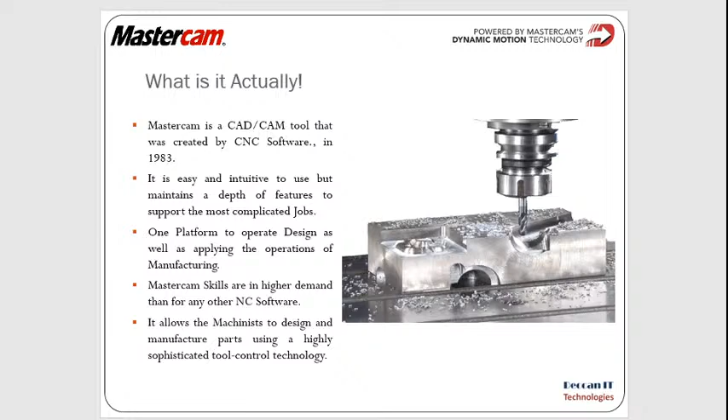CAD/CAM advantages: we have seen that complex parts and integrated shapes can be manufactured. Then effective utilization of raw material is also very important, because wastage of raw material not utilized properly is a huge loss to companies. Productivity is also very critical because everybody wants to manufacture as quickly as possible.

As we know, the era has gone when one part was designed, manufactured and sold for years together - like Premier Padmini or Bajaj scooter, sold for so many years. Now every year, every manufacturer has to deliver multiple models. That's why productivity is very important now, and eliminating costly mistakes and wastage also plays a vital role in manufacturing.

Next, because parts are being manufactured at different places, manufacturing with correct tolerances and precision is also very important.

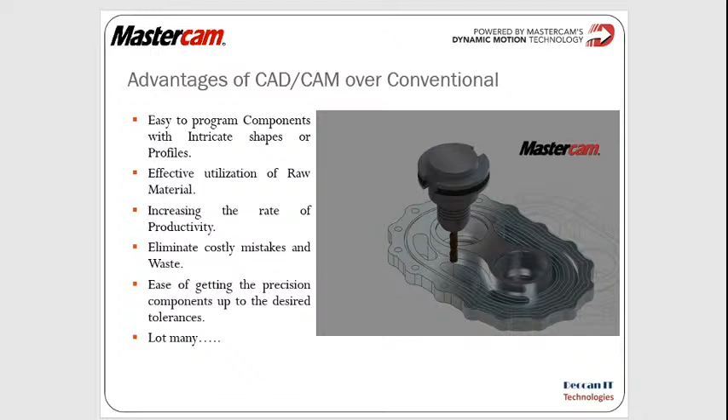Turning lathe can be an XZ-axis lathe. Many of you who have used CNC manufacturing in your workshop might be aware of that, or once you see the video you will understand what CNC milling is. Because of time limitation, we may not go through the turning areas.

So multi-axis machining is what you're able to see on the screen. That's multi-axis where not only X, Y, Z but A, B or C - that rotary table will have to rotate in order to cut the complex part.

Then there is wire EDM machining, which is non-conventional machining with wire at very high voltage. There is a spark taking place and the part is cut with an erosion kind of process, a high voltage erosion.

Another is the router. Router is almost same as a milling machine, but more used for plate or sheet machining, especially in shipbuilding, aerospace industries, helicopters, where different parts are cut from sheets for proper material utilization and manufacturing multiple parts in bulk.

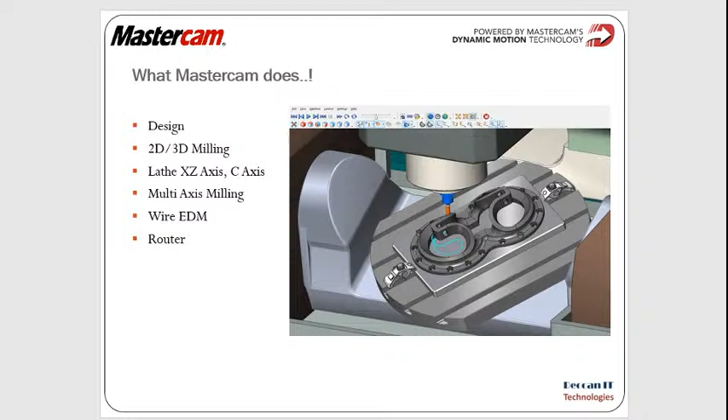So in design, as we see, you can create surfaces, solids, have different layers and labels, organize yourself for manufacturing, as you're creating fixtures and tools.

Whenever you get a CAD part from a customer, Mastercam has got almost all translators. If you want to do a project for one company, that company may use Creo, so you have a Creo translator. Another company uses SolidWorks, there is a SolidWorks translator. Somebody uses Autodesk, so there is an Autodesk translator. Apart from that, step and parasolid are normal neutral kernel translators.

So you're able to import that, create your project on Mastercam, and deliver it to the companies wherever you are doing the projects.

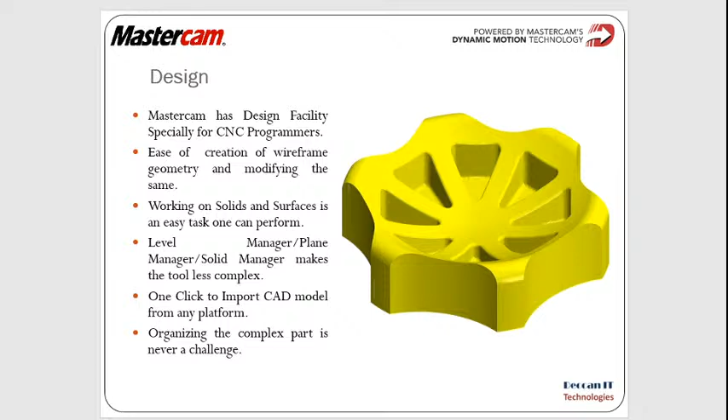For milling, various applications are there - maybe die and mold industries, turbine blades, different sectors. So the most complex manufacturing with high efficiency machining or high speed machining can be done here.

Because of the user friendly interface, you can easily change parameters and modify programs accordingly. Probing is also one option available with Mastercam, which can do on-machine inspection. There is a simulation tool within the software which helps show how the tool path is being cut. There are standard libraries, operation libraries, tool libraries, which help automate manufacturing. I'll just show you a small milling video here.

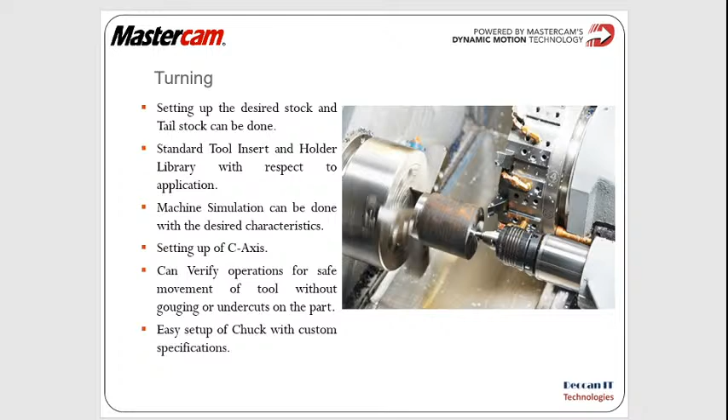I'll just have a look at some industrial users and education institutes proudly using Mastercam as their important CAD CAM tool. When you look at Army Base Workshop, Central Scientific Institute and Research, most of the very renowned institutions like Advanced Training Institute, BARC - Bhabha Atomic Research Centre, Delhi Institute of Technology, and BDL.

BDL is Bharat Dynamics Limited, a missile manufacturing company in Hyderabad under the government of India. Various advanced training institutes, engineering colleges, OFMA workshops and railway workshops are also users.

You can see NTTF, KGTTI - that is Karnataka German Technical Training Institute. NTTF all centers are using Mastercam, Indo-German Tool Room all centers are using it, and all technology centers of MSME are using Mastercam.

University of Pune - almost 100 colleges are using Mastercam not only for teaching but they conduct examinations also on the software. CTTC Bhubaneswar, CITD Hyderabad.

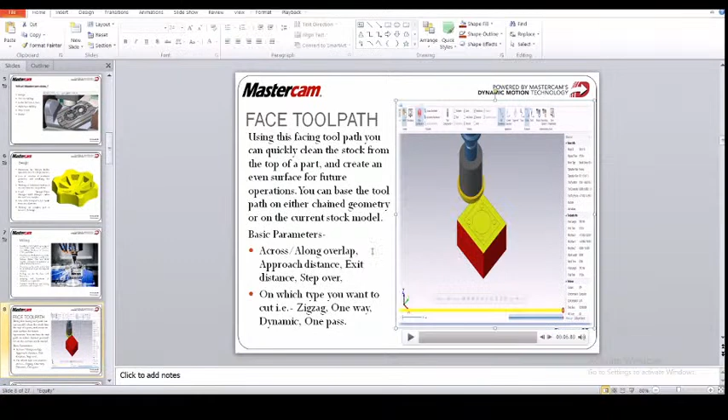So let me show you the Mastercam interface 2020. As you can see there is an existing model. On this existing model I have to create facing operations.

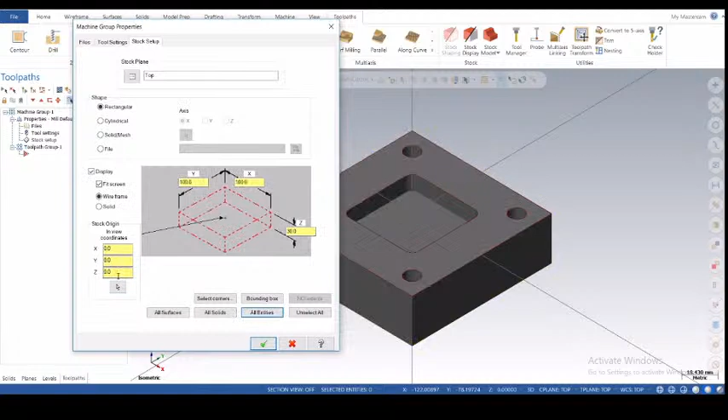So first of all for the facing operation we have to do the stock setup. For that we go to the toolpath manager, where you will get properties, and in properties you have to set the stock setup. For the stock setup we select all entities, and after that give the value of Z for the facing - I have given that and displayed it. After clicking OK, you will get the wireframe stock. This is our extra Z value, 2 mm.

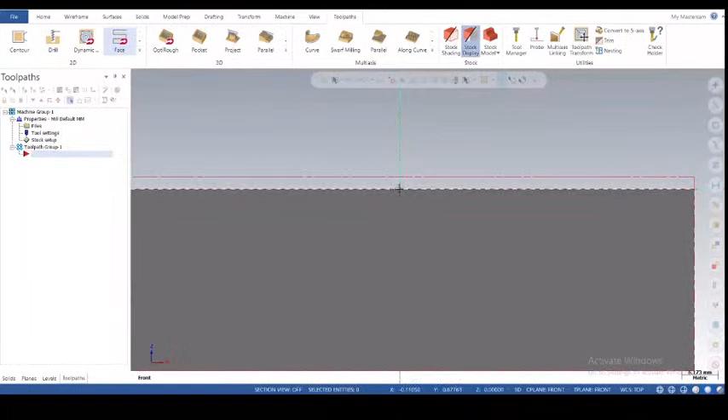After that, go for the operation from 2D toolpaths. Here you will get so many toolpaths like contour, drill, dynamic mill, facing, dynamic contour, pocket, and peel mill - there are various types of toolpath in 2D.

First, face - after clicking on the face toolpath, you will get a window for chain selection. Here we get several methods for selection, and we have to select the chain. After selecting the chain, you have to click on it.

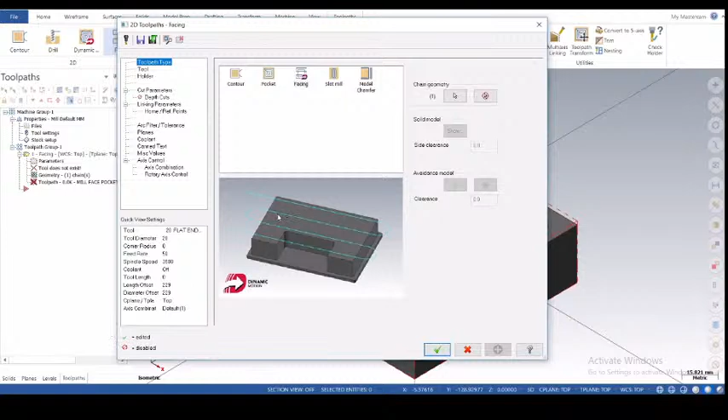Okay, after that you will get a window of 2D toolpath facing, and according to your application you have to select the toolpath type, which toolpath you are doing now. So I have to do facing, so I have selected face, and next we have to select the tool.

In this tool you can see various types of parameters like tool diameter, corner radius, tool name, tool offset, length offset, head, diameter offset. There are various cutting parameters and tool parameters. According to your application you can give the value of tool parameters or cutting parameters.

In this comment box you can write anything for the operator. For example, I'm writing here that facing with my tool that I am using or will use.

So for the tool you have to go to the standard tool library. To go to the standard tool library, you have to click on select library tool. After that you will get a lot of tools. If you want to filter, you can also filter. So after selecting filter I just got a face tool of 50 diameter and click OK.

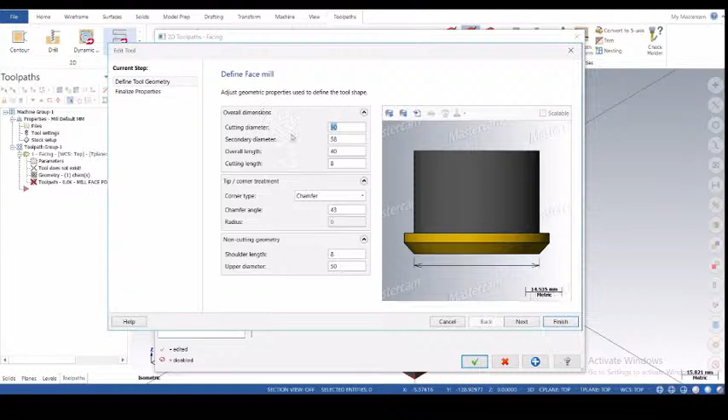You can also modify that. On right click of the tool you will go to edit tool, and here you will get cutting diameter, secondary diameter, overall length, cutting length. You can also give the corner type you have on your tool. After that finish, and in comment I'm just writing facing with

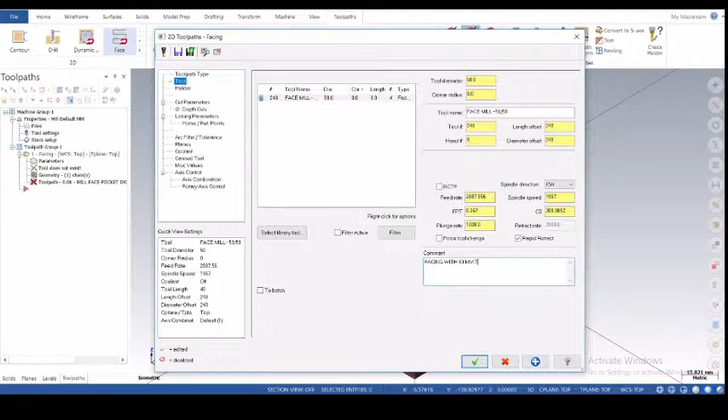50 tool. Okay, and coming to the next, the holder.

As per your facility or availability of holder, you can select the holder. I have selected BTC30016. Coming to the next parameters, in cutting parameters you will get the style that I told you in the PPT.

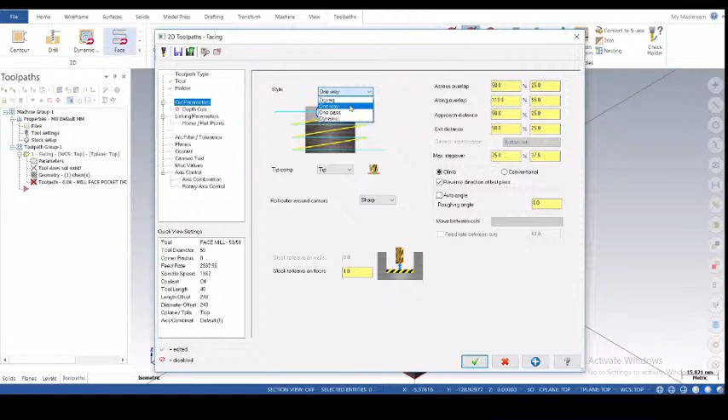There are 4 types of style like zigzag, one way, one pass, dynamic. Basically the most preferred and preferable style is zigzag, and here we will get across overlap, along overlap, approach distance, exit distance, and step over also.

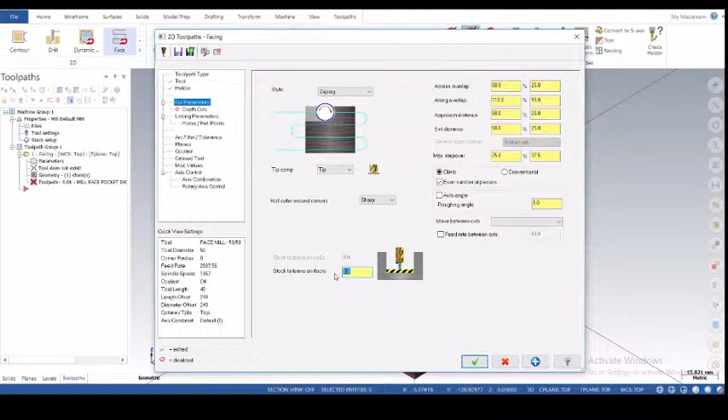After that here you can see climb and conventional, like down milling and up milling. After that, if you want stock to leave on floors, you can give that value, or 0. Coming to the depth of cuts, you can provide your depth of cut value—I am just providing 0.5.

After that, keep tool down. If you select keep tool down, then your tool does not repeat the retraction or clearance motion each time.

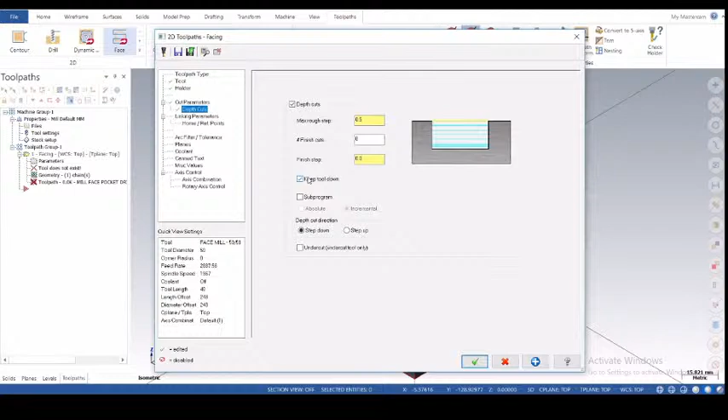Coming to the next, linking parameters—this is the most important set of parameters. In linking parameters you have to select clearance, give the value of clearance, and set all in absolute. The feed plane is okay with incremental, and depth also in absolute.

As you know, it automatically selects the top of stock. As you know, we have given the Z value plus 2, so it automatically generates that 2. After that we just click OK, and you will see the toolpath here.

This is our toolpath, and this is our along overlap, this is our across overlap.

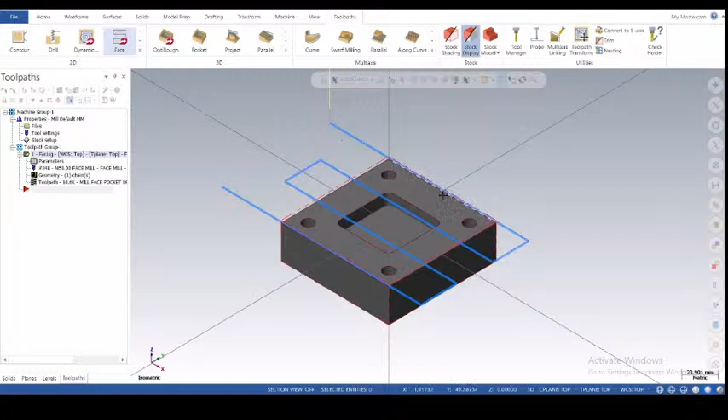Let me show you the 2D toolpath of this facing operation. Click on this backplot and you will get the 2D toolpath, how it's generated, and play. Just see how it cuts the material for the facing toolpath.

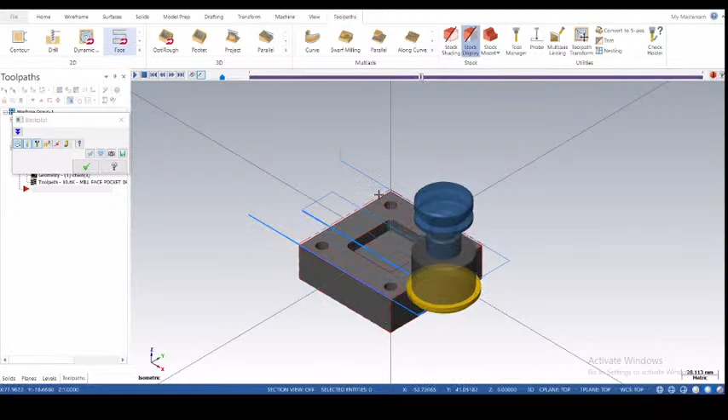This is our 50% across overlap, this is the along overlap.

And if you want to see this in the 3D simulation window, then you have to go to verify, and after selecting verify you will get another window for the simulation.

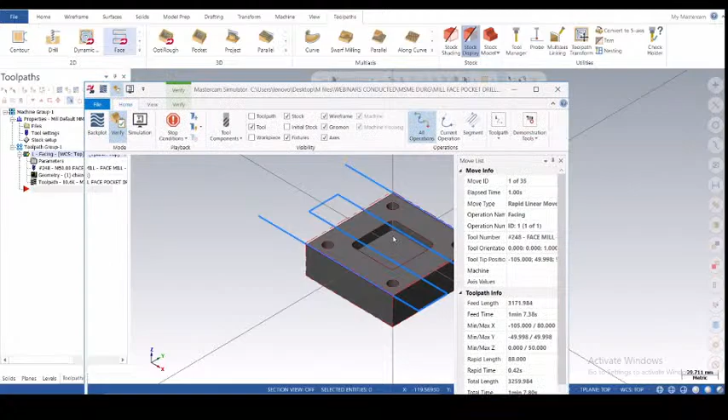As you can see, this is our 3D simulation window. Just decrease the motion of the cutting tool, and in this window you will get so much information like move ID, move type, what type of operation you're doing, the operation name, and which type of tool you're using. There are various types of information you will get.

This is our simulation window. Let me start the operation. As you can see, the tool is coming downward and cutting as per our given depth of cut, given style, and cutting method.

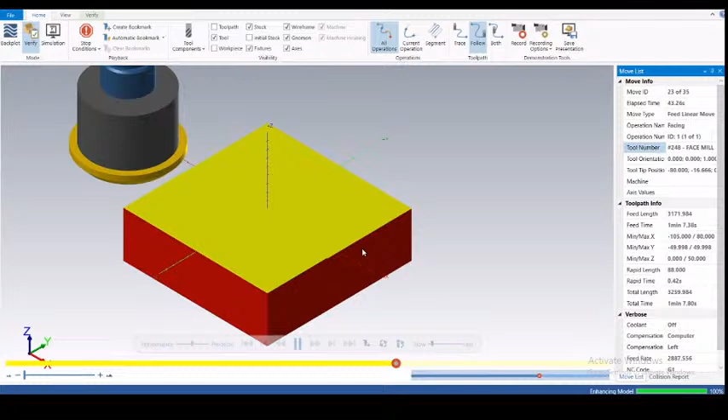So this is it for the facing operation.

And after OK, it will ask for the path where the file will be saved. Okay, I'll just save it on the desktop.

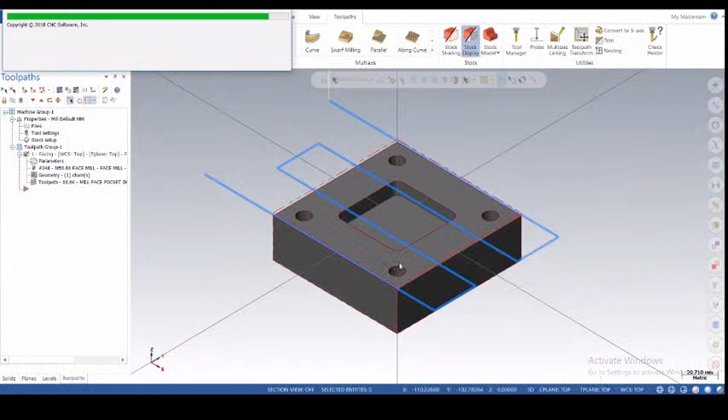After that, you will get a Mastercam Code Expert window, and in this code expert window you will get all the NC code as per your commands. You will get this, just see.

This is our all NC code generated. Okay, thank you.

Coming to the next toolpath is our pocket toolpath. This toolpath is used to clean out material from an enclosed boundary, using the specified depth of cut. It's used for the roughing process. Similar to other toolpaths, there are basic parameters like rough cutting methods, step over percentage, entry motions, depth of cut, and linking parameters.

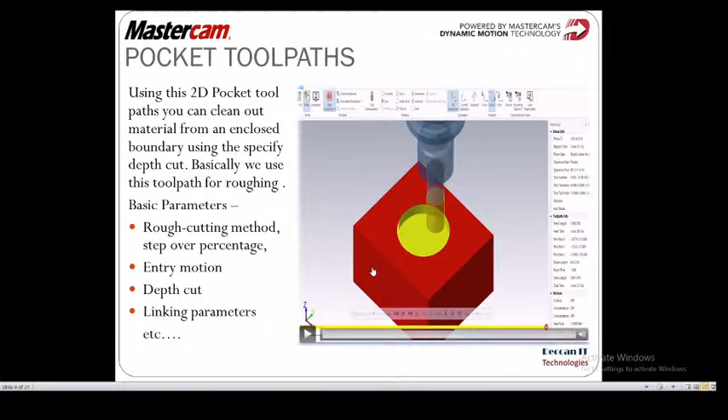Let me show you the Mastercam interface with this pocket toolpath. As you can see, here is already existing material. On this existing material, I have to run a pocket. For the pocket, I have to choose this pocket option, and by selecting the chain, I have to select that chain, keeping in mind the arrow direction.

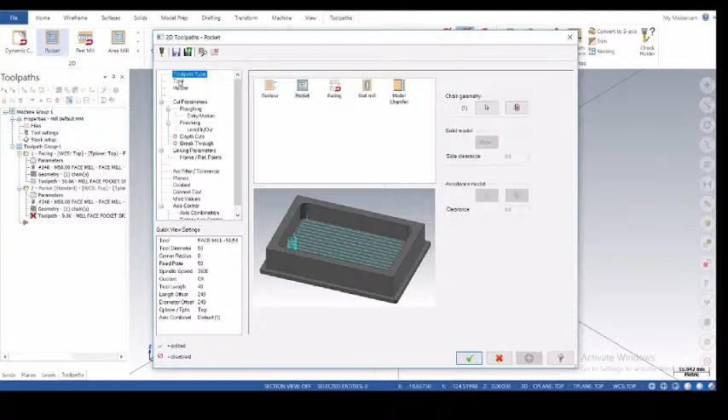So this is our toolpath type: pocket. Coming to the next, in select library tool, suppose I have selected a flat end mill. According to your application you can provide your cutting parameters, tool parameters, and what is the holder, and the cut parameters. Here you can see stock to leave on walls for the finishing purpose. I just click on 00 because we don't need any finishing.

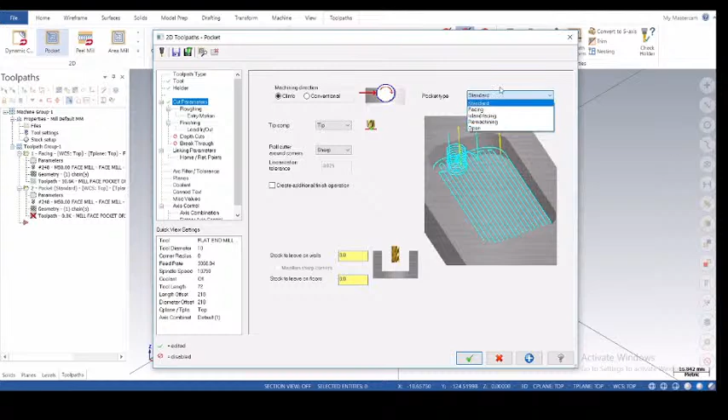Here is the pocket types. You will get the pocket type standard facing. Next is roughing, where you will get some cutting methods like zigzag. I just select parallel. This is the step over percentage or step over distance. Come to the next, this is the entry motion, how it will enter.

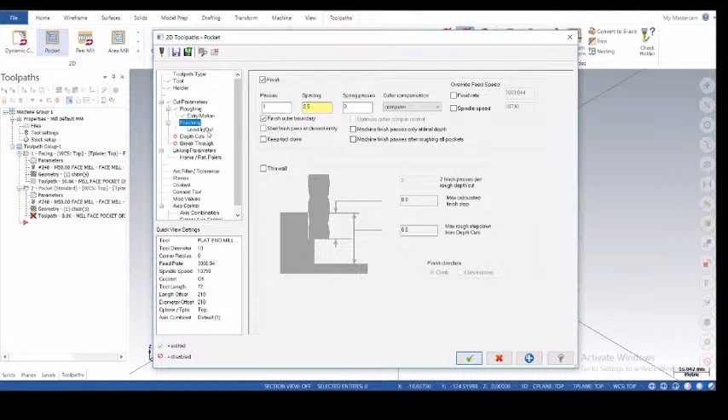Coming to the next, in finishing, if you want to do any finishing passes, you can provide that. And lead in lead out, this is not necessary - I will tell you about lead in lead out and why we actually use that. And depth cuts, 1 mm.

Keep tool down, linking parameters, and clearance as per your requirement. Top of stock, since you already did that facing operation, and depth - for depth we have to select or choose the depth.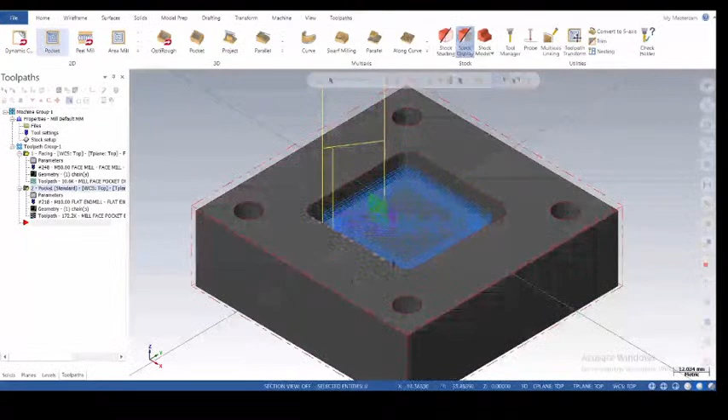As you can see, this is our 2D toolpath. Let me show you how it cuts the material.

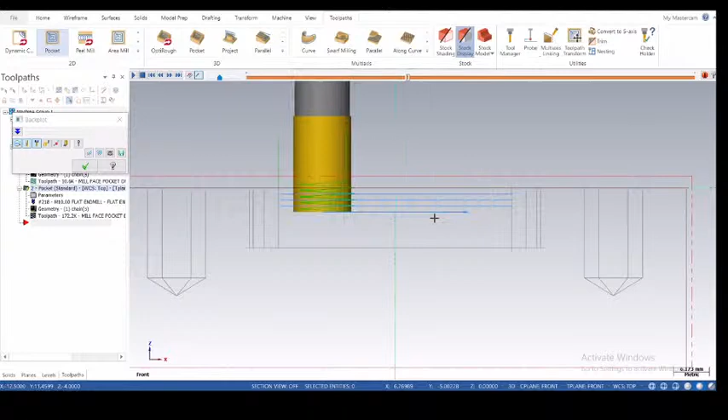As you can see, as per our given depth of cut value, it will cut that material. Let me show you in 3D motion. For the 3D we have to go for this verify, and you have to just start on play, and you can see how the material will be cut.

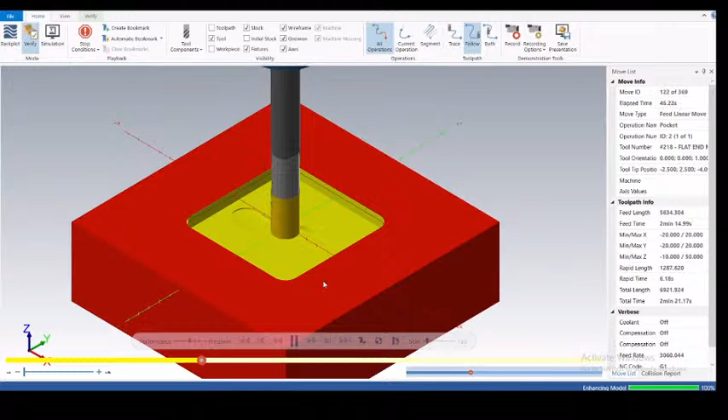Coming to the next operation is our contour operation. For the contouring we have to select the contour toolpath. Here is the contour toolpath, and by selecting chain, I have to select the chain for the contour operation. This is our chain.

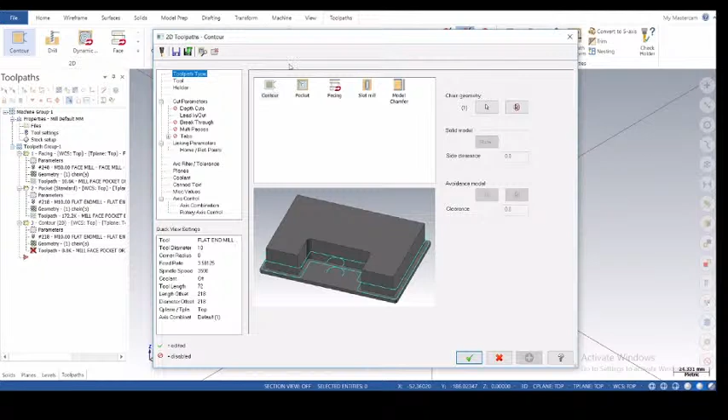After that you will get the same window. For the toolpath I have to select contour, and I've selected the same tool, flat end mill 10 diameter, and go for the cut parameters. Here you have to define compensation direction, on which side it will go, and here is stock to leave on walls, stock to leave on floors, and go to the depth cuts.

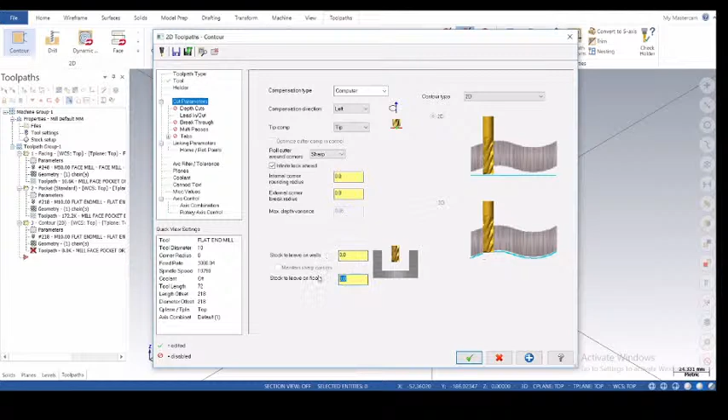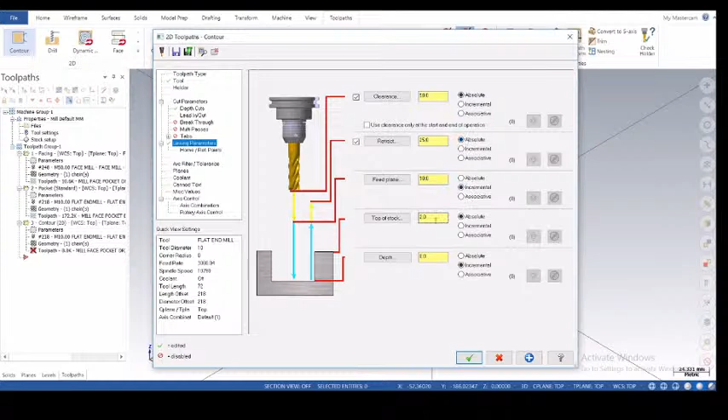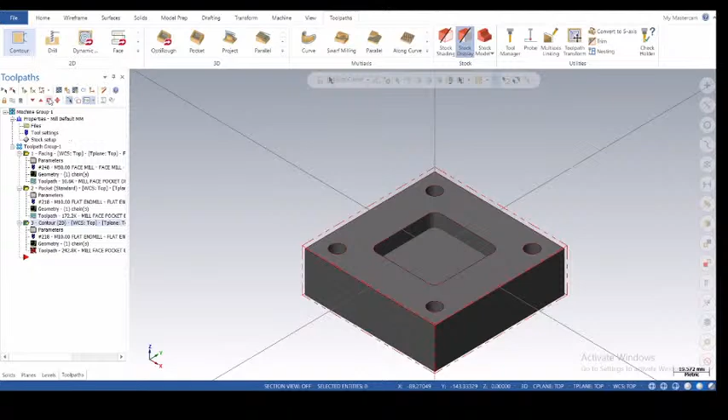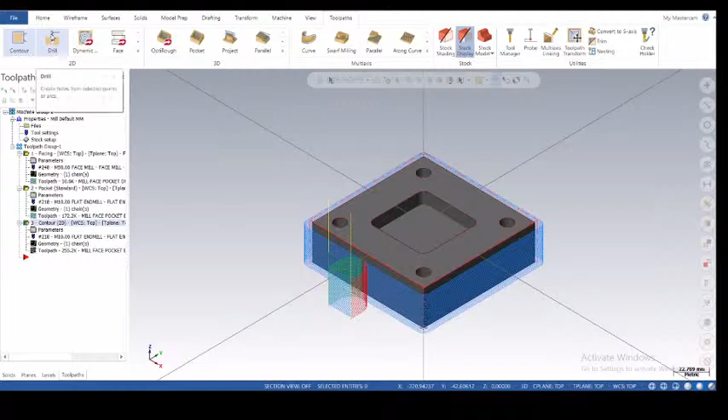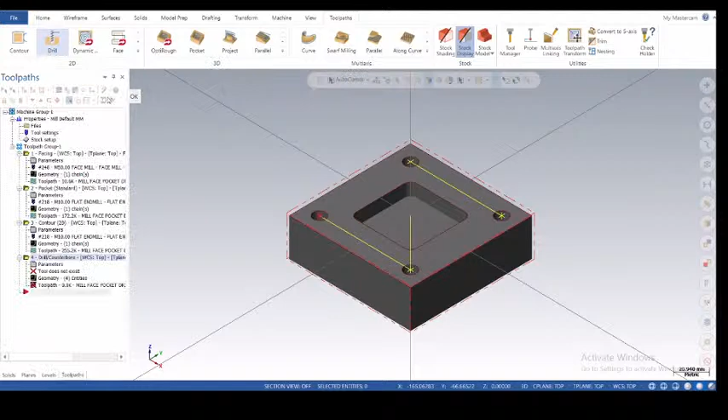For the drill we have to select the drill 2D drill toolpath. By selecting this mask on arc, we have to select or find out the arc. After that, just drag on that and drop, and by selecting the order you can define the order. Same as it is, go for the tool as per your diameter.

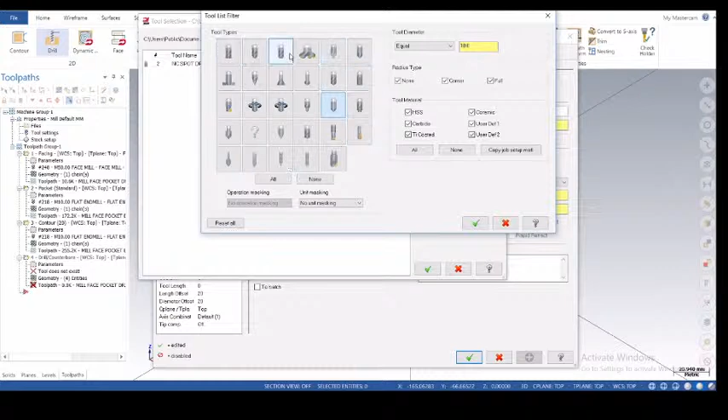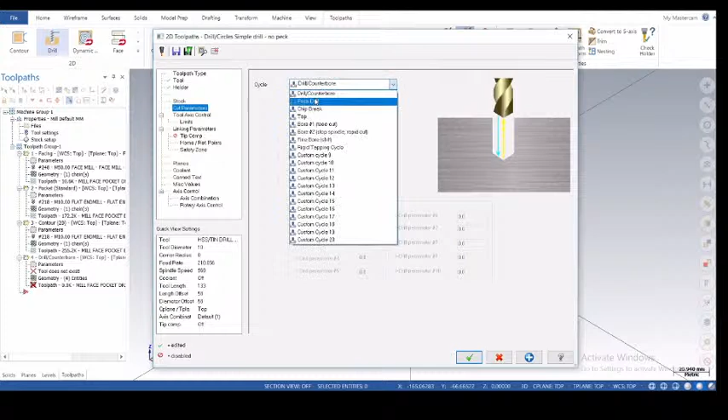If there is any availability, then it will be easily identified. You will get a lot of types of tool, and this is our drill - 10 diameter, that is the availability of the 10 diameter drill tool. Go for the holder, select the holder, stock, non-edit, cut parameters, what type of cycle you want. If you want peck drill, just click on peck drill and give the peck value.

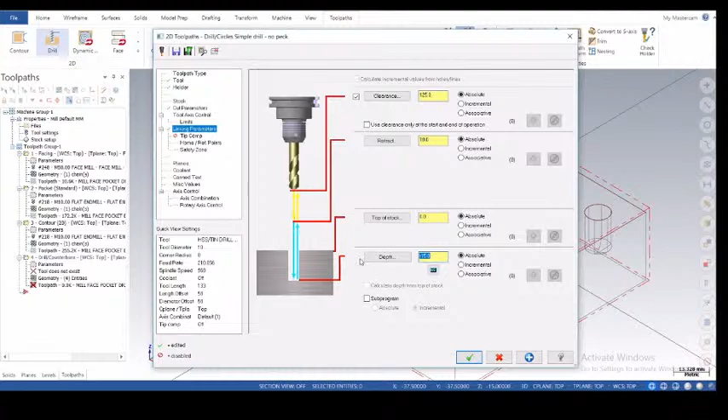Go for the linking parameters, activate the clearance and retract, and go for the top of stock and depth. How much depth do you want? As you can see, this is our depth, so I just give that, and okay, this is my drill toolpath generated.

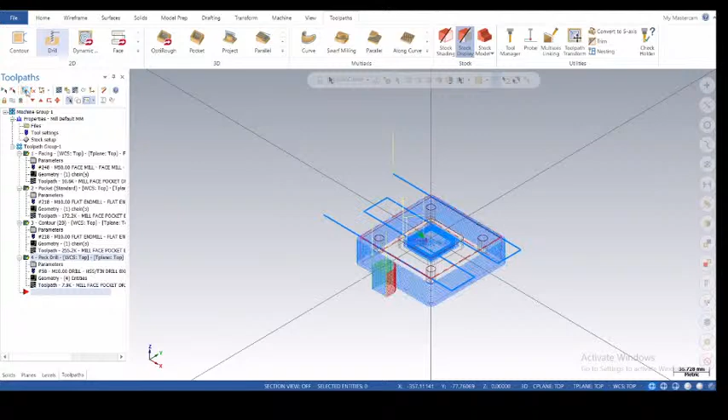Now I will show you the whole operations in a 3D simulation window. Just click on it, regenerate all toolpaths, and go for the verify.

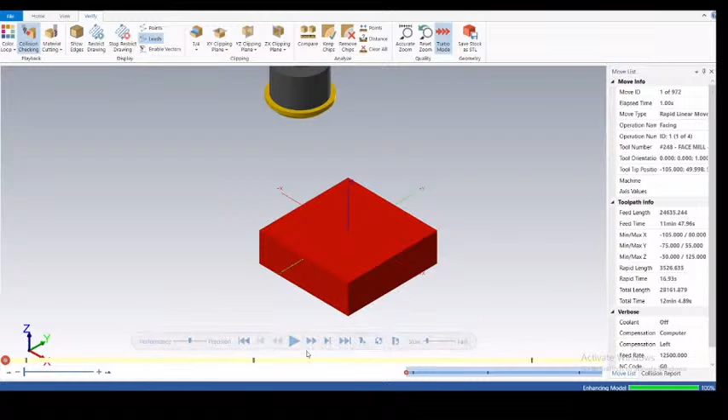And here you can set the stop condition. You can apply the stop condition by choosing the operation change, and you can also give the color loop by operations and just start it. Okay, now start.

So first, the facing operation is done. Next is our pocket operation. And next operation is contour. Here you can see that in the information.

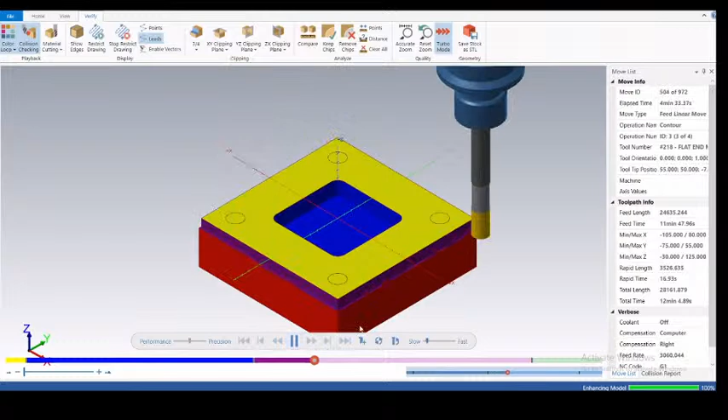Okay, and next operation is our drill. Okay, so this is it.